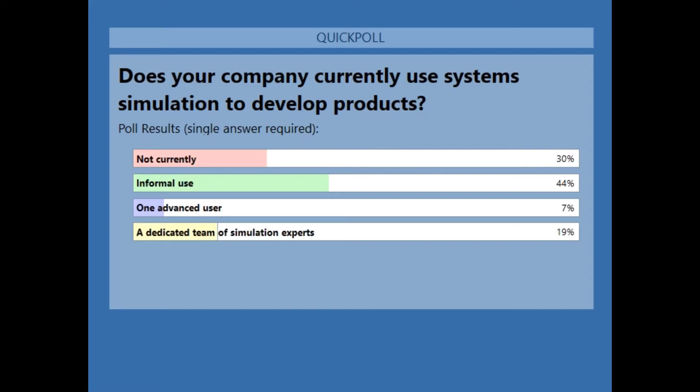So I will spend a little time giving you some background on system simulation, and in particular a tool that we use, which is Amesim. Okay, let's hide those results. Hopefully you can see my screen again, so we'll continue on.

So just a quick overview of the tool you'll see a fair bit of during this session, a software tool called Amesim, which we use for system simulation. Next I'll show you a practical example of the usage. This is just meant as an introduction to the whole idea, key concepts around system simulation, and the type of tools involved.

Amesim is the tool we're talking about, and you'll see a lot of these type of diagrams in this presentation. Basically, what it allows you to do is build up system models of your system. Here we're primarily focused on the mechatronic aspects of it, so you can see some things you might recognize, like a ram for a hydraulic system or a valve. As part of the tool we have a whole group of libraries available from different area spaces, so you can see hydraulics, pneumatics, and we'll show a fair few examples of this as we go through the presentation. What you use this for is to build up a system model of your system.

It can be done as a small number of components or an entire vehicle. And then there's a lot of things you can start doing with that in terms of developing a product. You can do system sizing, and I'll cover some of that in the next few slides. You can look at controls validation, and we'll see how you can also link this into hardware in the loop, software in the loop, etc. So that's what the Amesim tool is, and this is what a lot of the diagrams you'll see in this presentation are based on and built with.

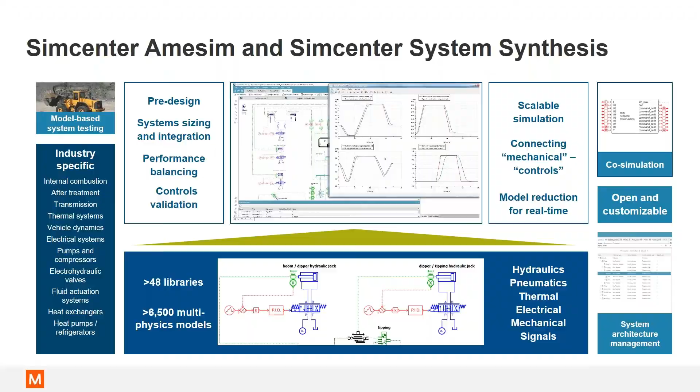So one question you might think is, why would you do this in the first place? Some of the things that come to mind in this particular example would be, clearly we're trying to reduce emissions, so we're taking vehicles like this and electrifying them to reduce emissions, and there's a lot of regulations out there driving that in the industry. Another aspect is to stay ahead of the competition - building more efficient, cleaner vehicles is something everyone wants to do. So this is a tool and methodology that can help you do that very efficiently without building lots of prototypes and doing lots of testing. You can use the system models to gain a lot of information at the beginning of the design process.

With that in mind, I've outlined a couple of challenges you might have if you set out on this kind of path - to take an existing vehicle design and try to figure out how we could make it zero emissions, maybe a battery motor driven electric vehicle. So what you see on the screen is an Amesim system simulation model with the different components that make up our excavator. What we're going to try to do with this is firstly identify the power requirements of our system, so that we could figure out what we need in terms of electric motor and battery power, and then if we plug that system in, will it provide enough energy and power to operate our vehicle in the way that we need it to.

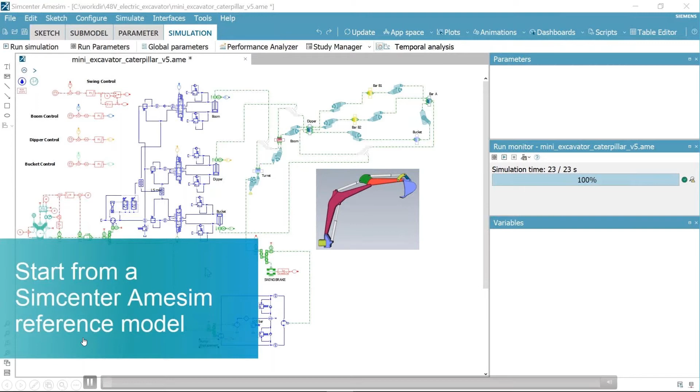And remember, our first objective here is really to figure out what's the energy requirement for our excavator if we were going to replace that engine system with a motor and an equivalent battery. So one of the things you can do with the Amesim tool straight out is model the 3D mechanical characteristics.

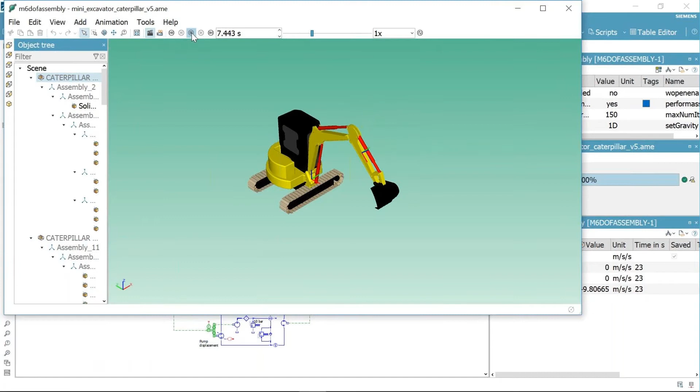Just to help explain what's going on here, this simulation is driven from the simulation model we've just seen, and we just use a simple 3D representation to see what's going on. This is stuff you can do with Amesim. So that is kind of a drive cycle that we're running through this model.

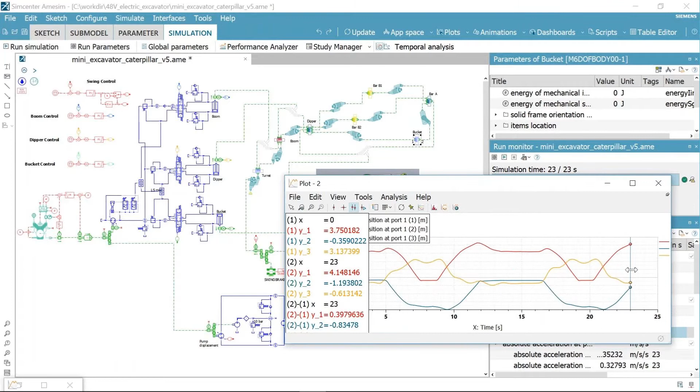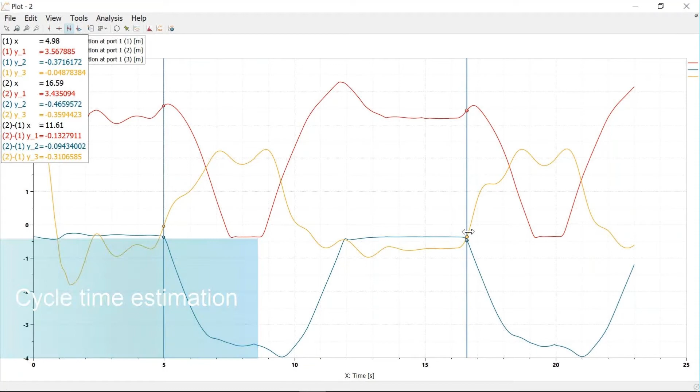As a result of running that drive cycle, we can now interrogate the model, as you can see on the screen here, to see maybe the positions of the different hydraulic rams in the excavator design at a particular time. And something quite useful we could get out of this is an understanding of the cycle time for that particular load cycle we were looking at - how quickly our current excavator runs through that cycle time with its current power ratings, etc.

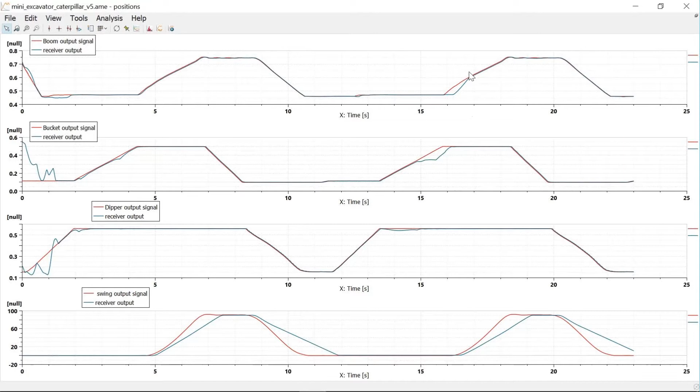Another area we could look at is the responsiveness of the system based on the power available and the reaction of the excavator arm to those input commands, and the resulting load on the hydraulic pump, for example. So we can see how you could model that with a systems model.

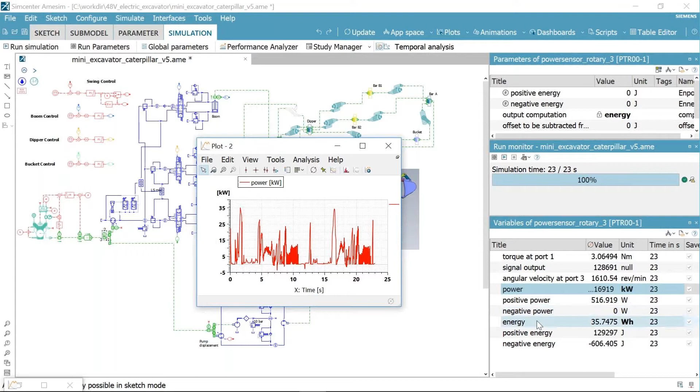Here we get to our challenge, which is understanding, okay, for that duty cycle we've just seen, how much power is required to deliver that, and we can see the accumulation of energy requirement there.

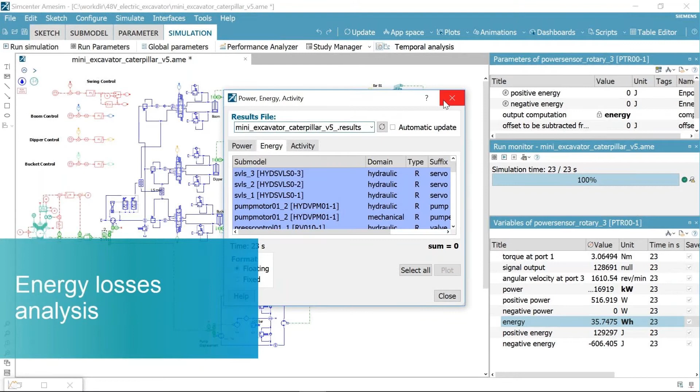And you can imagine how that then can start informing sizing up electric drive and possible battery requirements if we were going to make this an electric solution rather than engine driven. Another thing we can look at is where that energy is being used, and we can look at a breakdown of the energy losses in the different components in our excavator model.

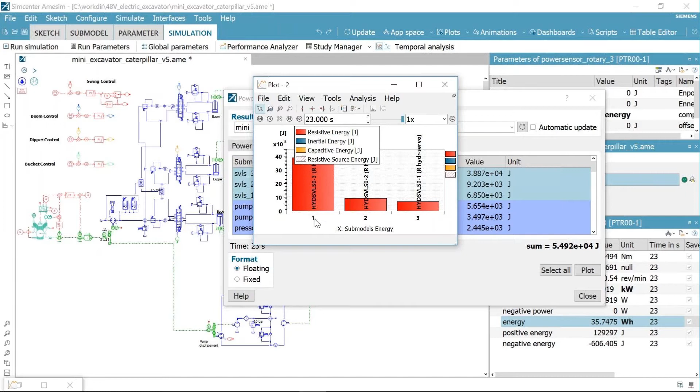So yeah, just illustrating some of the practical uses of a system simulation model. And finally, this final plot shows the total energy consumed by the system, which we can then use to feed into our further design steps along with the cycle time here.

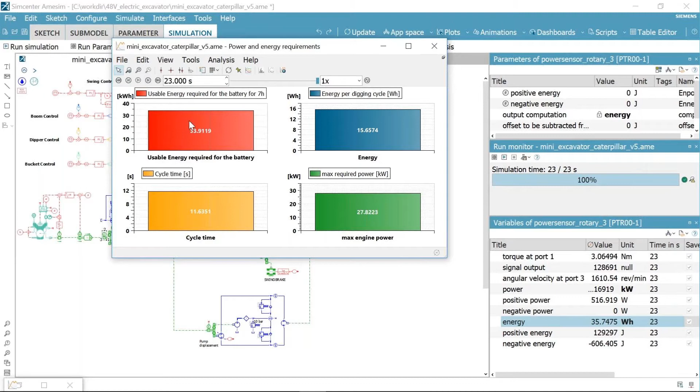So hopefully that gives you a little sense of what these systems models are and the kind of things you can start doing with them. If we move to the next slide here. Just to recap, we saw how we could build out a systems model, look at the energy requirements and cycle time.

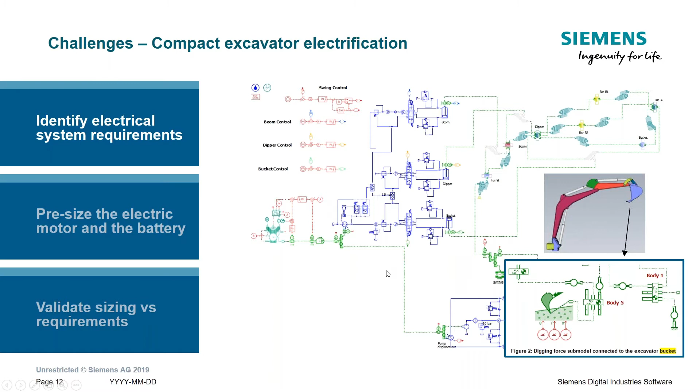And this will come in important further on in the presentation - you can also look at things like the interaction of the bucket with a soil model, and it's possible to do some of that in Amesim. Darius will show how we can take this even further into 3D models and into real-time models as well, but you can start out with everything at this simpler level within the system model.

Just watching my time, I'll keep moving forward here. So electric components need then to be chosen to meet those power and timing requirements that we've just figured out in the previous step. That's something else you can do with system simulation.

So this is the exact same model, but you can see now the user has converted the engine into a motor battery power plant, and we can build up the complexity of this.

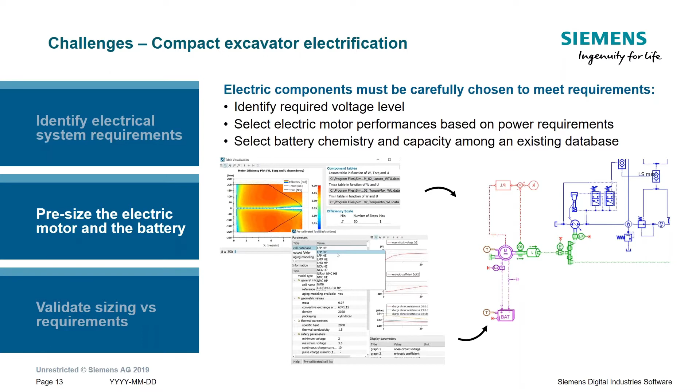This is relatively simple at this stage, but we can start bringing in our motor characteristics and understanding how different characteristics of that motor will affect the performance of the system. We can also start selecting the battery pack, and Amesim and the system simulation tools allow you to do quite a lot of things in that space. Then finally, we might come up with a candidate design, and we want to figure out how efficient that is, what its charge behavior would be, will it meet our requirements, and we can look at advanced things like the aging of the battery pack over multiple duty cycles.

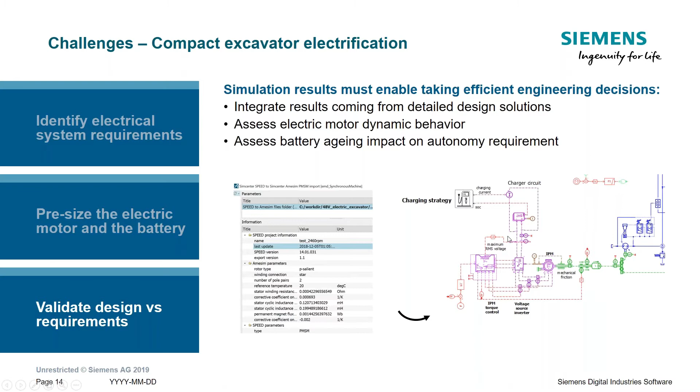So just to summarize some of the practical things you could do with a systems model to get you thinking about the possibilities: we can identify the electrical system requirements. We saw in the video how you could figure out what the size and power requirements are. We can then use that information to size up the electric motor and battery, and then use our systems model to validate those designs and see what the dynamic characteristics are of the system. But that's only part of the picture.

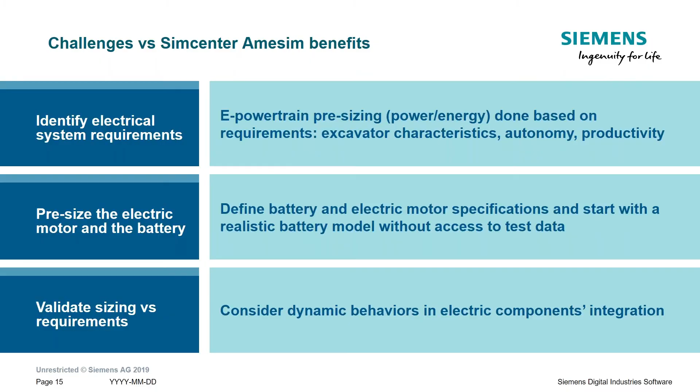We can also use this, effectively a digital twin of our excavator, in man-in-the-loop, software-in-the-loop, hardware-in-the-loop, real-time integration. So we can take that model and convert it into a real-time model and use it to validate controls, either software controls or hardware controls, or we can put a kind of man in the loop, which is something Darius is going to cover in subsequent sessions in a lot more detail, to understand how this system's going to perform and how it's going to feel for the operator.

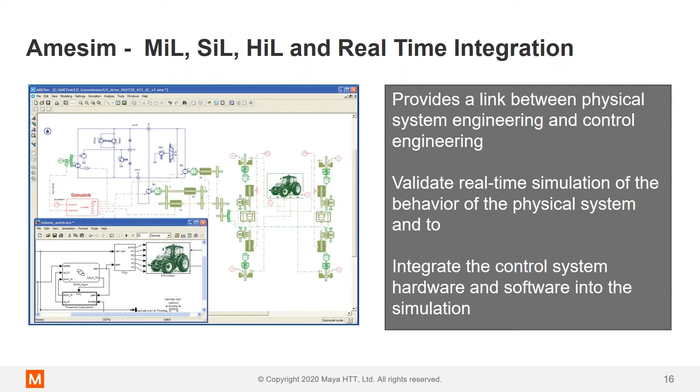So I'm hoping that's given you a little sense of some of the possibilities around system simulation and the Amesim tool. I'm now going to hand over to Darius to get into the detail of hydrogen fuel cells.

Okay Adam, thank you very much for the introduction. I'm trying to take over the controls. Okay, you should be good now. Let's try it. Okay, so we've got the first question here. Darius, do you want me to turn this poll on? Yes, please. All right, I'll let you introduce it.

So the question is whether your company is actively looking at zero emission solutions, or whether you are investigating opportunities for deploying this type of solution into your products. Very simple answers: not yet, or yes, battery electric, or yes, fuel cell electric. So whether you've got a pure battery powered solution or you are more towards fuel cell and hydrogen.

Okay, thanks for those who voted. I'll share the results. So we had around 42% of the folks who responded say not yet. I guess it's something you might be looking at as you're on this session. And then an interesting mix: 33% of the folks who responded battery electric, and 25% fuel cell electric. So hopefully you can see that on your screens. I'll hide that again.

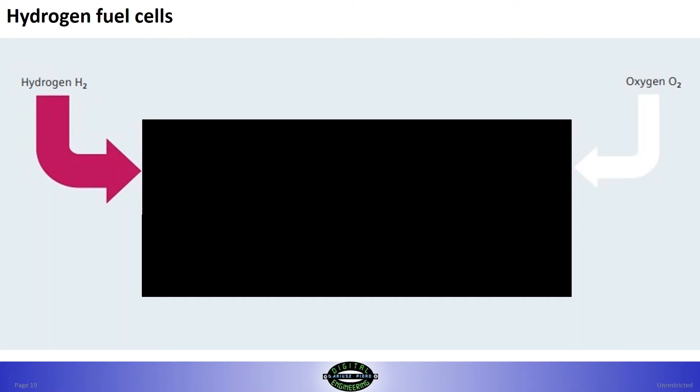So first of all, we have to understand what the fuel cell is. We'll start with a black box approach: as long as we supply hydrogen and oxygen to the black box, the fuel cell, it will provide electricity. When you look into the fuel cell in more detail, you will see there are three main components: the polymer electrolyte membrane, or proton exchange membrane, and two electrodes, anode and cathode, similar to batteries. This is actually an electrochemical device, so there are no moving parts. As long as we provide those reactants, hydrogen and oxygen, we get an electric current generated.

So how does it happen? On the anode side, we've got an electrochemical reaction taking place which allows electrons to be split from a hydrogen molecule. As a result, hydrogen protons migrate from the anode through the electrolyte to the cathode side. As soon as we connect the external load, electrons have a path to flow through the external circuit and migrate from the anode side to the cathode side as well. Then on the cathode side, we've got oxygen coming with air, electrons coming from the external circuit, plus hydrogen protons, and another electrochemical reaction takes place which combines all of them and creates water.

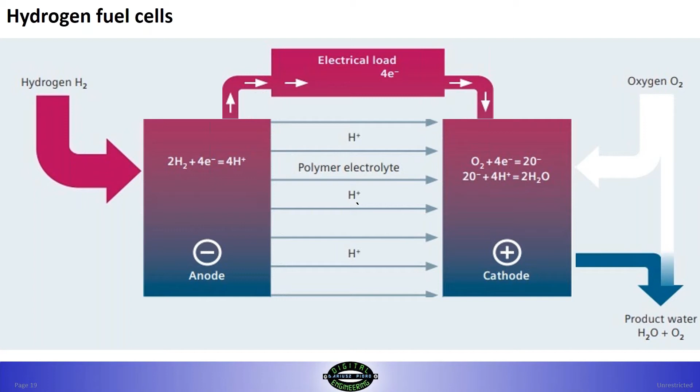During the operations of a fuel cell, some heat is also generated. So I suppose this is the simplest way to explain a basic fuel cell operation. What I'd like to highlight also on this slide is that the external current demanded by load is directly linked to the hydrogen and oxygen quantities. So let's keep in mind that the fuel cell will work perhaps in the optimum way when conditions are steady state, meaning the load is not changing. So let's say you've got a fixed current demanded by external load, and for these conditions it's quite easy to maintain the reactions happening and incoming hydrogen and oxygen. So it's very important to keep in mind that steady state conditions are perhaps most favorable for a fuel cell.

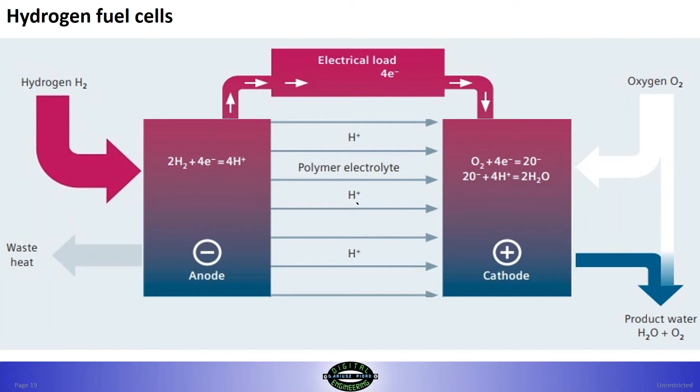One single cell is not really a powerful device. In order to meet power requirements, we will most likely need to connect multiple cells together, and by doing so we end up with a fuel cell stack.

So on this slide, I've got a fuel cell stack here, trying to highlight it with my pointer. As you can see, the fuel cell system is a little bit more complicated than just a single cell, and we can distinguish four main parts of it. Apart from the fuel cell stack, we've got the hydrogen supply subsystem, and also on the oxygen side a supply, where oxygen comes in most cases from air, so we've got this subsystem here. Also, in order for the fuel cell to operate well, you have to maintain temperature, so thermal management is quite important. For that reason, we've got a cooling subsystem, or thermal management subsystem, if you like.

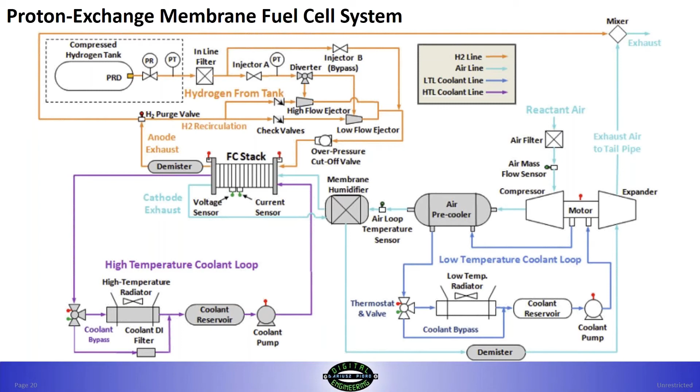I'm not going into details describing every single component here. I just want to highlight that designing and developing fuel cell systems is an engineering challenge, an engineering task on itself. So when you develop this system you've got challenges, and then when you want to deploy it into an application like a bus, car, or any other application, you have to overcome even more challenges. I'll perhaps come back to this on another slide.

Fuel cell idea is not actually a recent idea. It's almost 200 years since Sir William Grove first advertised, or came up with the idea, that a fuel cell will work. I think it was in 1842 when he actually presented a working fuel cell. Since then, fuel cell technology has been in development, we can call it. Over the years, there were different applications like space shuttles, spaceships, or different projects when they wanted to prove that fuel cells can be deployed to off-highway machinery like a tractor, or then on-road vehicles like passenger cars or vans. So over the years, the development was happening, and over the last decade I suppose we've seen the most advanced development.

Also, it seems that there is now a lot of talk about zero emissions, carbon neutral societies, and many countries now are putting forward roadmaps, legislations, proposals for achieving these targets. Fuel cells and hydrogen are taking, I would call it, a main stage in those proposals and roadmaps. So it seems that the time is right.

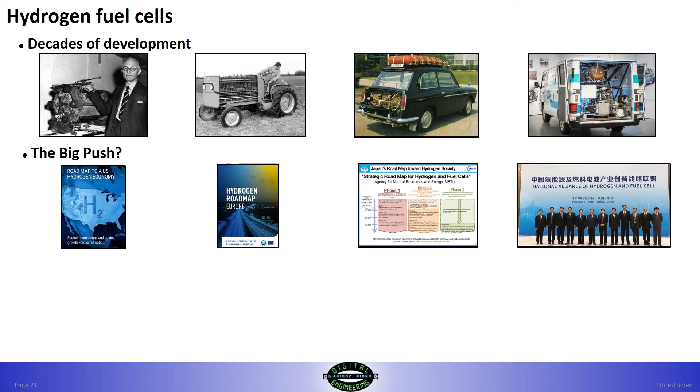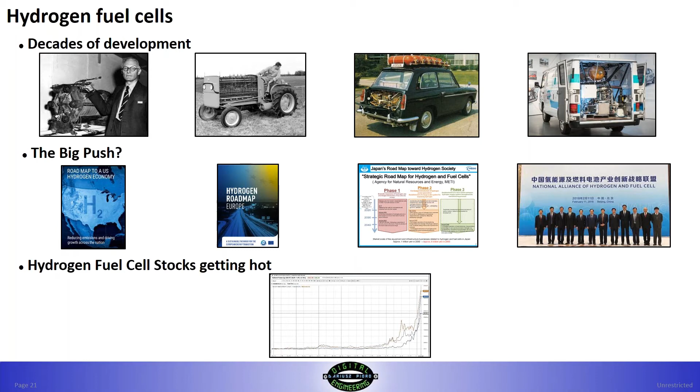And if you go to the off-highway market, fuel cell is actually already present there to some extent. If you think about forklifts working in warehouses, there are already around the world about 40,000 forklifts powered by hydrogen fuel cell powertrains.

Also, other examples off-highway might be excavators. You might be aware that JCB last year has shown a 20-ton excavator powered by hydrogen fuel cell. A few years before that, Volvo showed a smaller, about 3-ton machine powered by a fuel cell provided by their partner Symbio from France. And Hyundai has announced that by 2023, they will offer commercially available heavy equipment powered by hydrogen fuel cells.

So it shows that the projects are getting into bigger scale and more complex machinery. And also in agriculture and open mining machinery, there are some example projects already happening there.

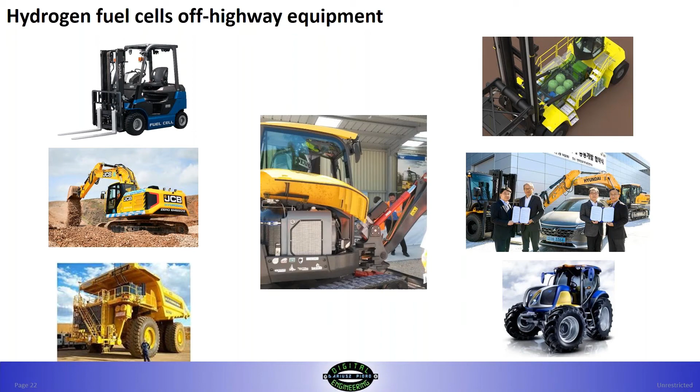There are tools and methodologies that are helping with developing such applications, and this is why we are here. So at this point, I will move towards an example. But before I describe the example, I'll touch on the software I'm using. As Adam presented Amesim extensively, I won't focus too much—I'll just say it's a very powerful, in my mind, multi-domain, multi-physics simulation package.

However, over the years, I was always tasked with providing a real-time digital twin that we can actually operate—meaning you can have a driver, a human being pulling the joysticks, pressing the pedals and controlling the steering wheel, and then deploy simulations to this level. For that reason, we had to link Amesim to different tools, one coming from Simcenter called 3D Motion. I'm not an expert on this one—I learned about it a good few years ago, and it wasn't doing what I needed, so I moved towards another tool, Mevea simulation software.

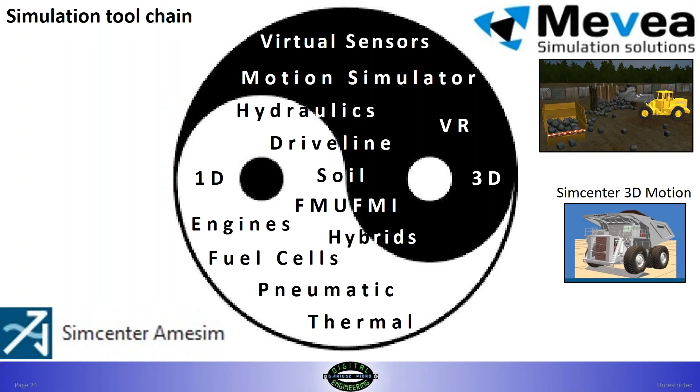And that combination I'm using towards virtual product development. So now I will take you through the steps of how to develop a fuel cell powered wheel loader from scratch, if you like. The whole story starts before you've even got any CAD design done.

We decided that this is a wheeled machine that has got a bucket in front, and we want to move, let's say, a specific payload from specific place A to B at a specific time. And what we do at this phase of the project is use Mevea simulation, which also comes with a simulator. You have to have this human machine interface.

It can be a very advanced simulator, 6 degrees of freedom, virtual reality, or curved screens, or it can be a very simple setup like on a desk, where you've got pedals, joysticks, and a steering wheel. So it's up to you what you want to have.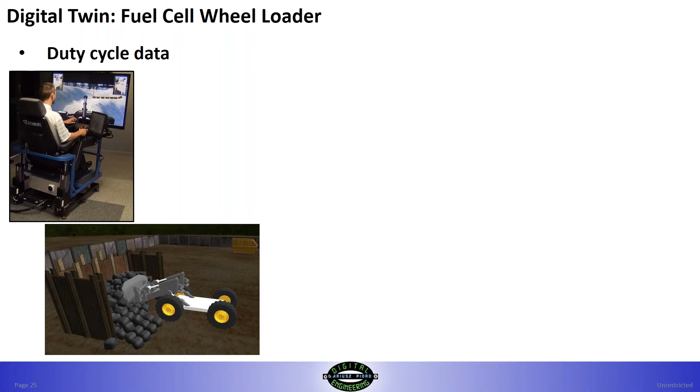But anyway, we give this to the operator and task him to drive this machine. It's a virtual machine. He is operating a duty cycle that we task him with. For example, it can be a short loading cycle when you ask him to go into the pile, grab as much as he can of the stones, and dump them into the skip, and repeat it. At this stage, we do not simulate any hydraulics, any drivelines, any power plant, either engine or fuel cell. We just basically have wheels and actuators.

And we make control of the wheels dependent on the pedal positions, and actuators we control from the joystick position. So we scale the joystick into the actuator velocity, and the operator has a way of controlling it. If he pushes the joystick farther, the actuator moves faster, and so on.

And then by performing a duty cycle, he has to focus on controlling the machine in the right way. He cannot go very quickly into the pile because it will make the machine unstable. He just consciously operates the machine.

As the results of this phase, we're getting data. So you've got a virtual representation of the first cut of the machine, if you like. And what you're getting is actual data for the torque, speed of the wheels, and velocity, position, and force of the actuators.

Thinking about the project in advance, normally to get this type of data, you have to instrument a machine and put it into the proving ground, test it, and get the data there, or you have to use some scaling down from an existing product if you've got some data. So what we're seeing here is a massive advantage of getting actual data very early, at an earlier phase of the project.

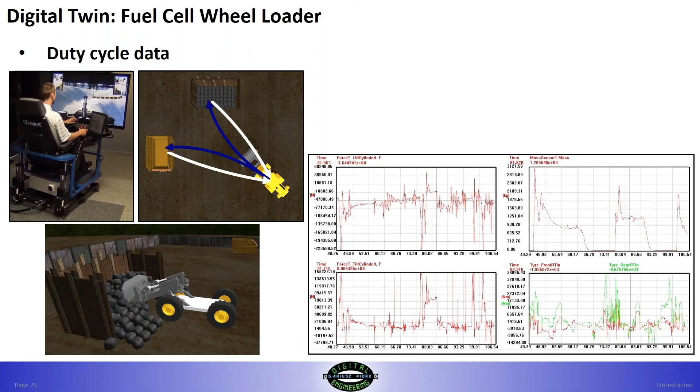And what do we do with this data? We move on to Amesim, and now we use the torque speed information from the simulator to design the driveline, and we design it from the wheel.

If you know that you've got, let's say, 4 wheels, and you want to have a type of 4-wheel drive or transmission, whether it's mechanical transmission or hydrostatic transmission, you build as many Amesim configurations as you like, as you need, and you benchmark them against each other in Amesim. So you've got, as Adam showed, your ways of comparing different configurations, changing parameters, and different layouts as well.

So if we have to pick up the electric motor characteristics or battery characteristics, we do it right. We select it for the duty cycle that it has to meet in real life.

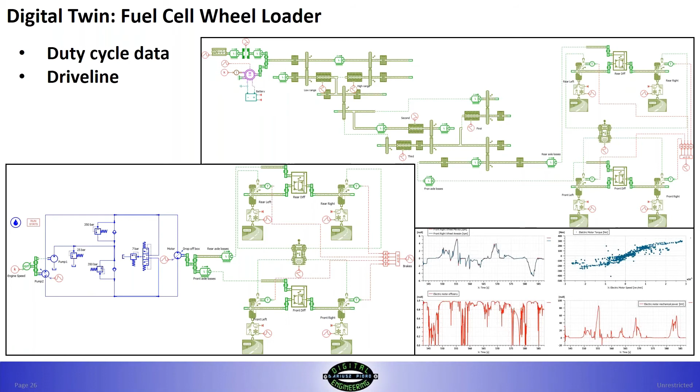And similarly, we do with hydraulics. So when you've got now actuator force, displacement, position, velocity, and force, you can pick up a hydraulic ram size, i.e. piston diameter and rod diameter, and from that you will get the pressure and flow required by this single cylinder.

If you do it for all the services, all the actuators within your machine, you will get the hydraulic flow demanded by the combined services. And then you can decide whether you meet this flow from a single pump or multi-pump solutions.

You've got 4 valves making up the service control of a single service, and those valves are controlled from the ECU, the electronic control unit, which sends signals for the control operations.

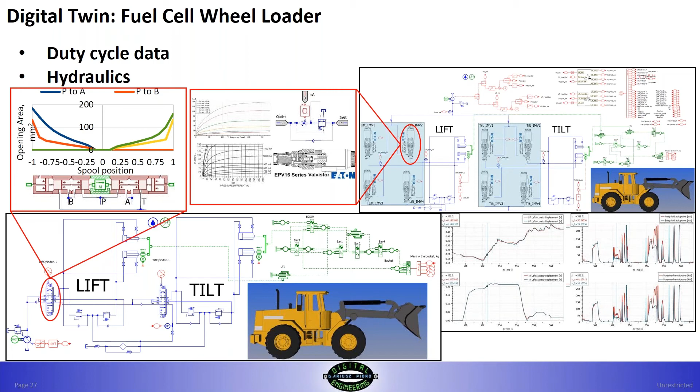Now we're moving to fuel cells. When you've got a driveline and hydraulics, in the case of a wheel loader, those are perhaps the 2 main systems demanding power. From those 2 separate simulations, you can generate information about power demand, and then move on to the fuel cell.

Amesim is a very flexible simulation platform, because when it comes to fuel cells, it allows you to develop a single cell, almost from the geometry of the membrane and the cathodes and the size of the fuel cell, and it will provide you the polarization curve.

That curve shown here on the graph has on the x-axis the current density of the cell, which is the current generated by the cell divided by the area, and then the voltage provided by the cell.

This is very crucial information, because based on it we build a fuel cell stack and decide on the voltage the fuel cell system has to provide, the current, which will dictate how many fuel cells and what size the fuel cell is, and so on.

At the same time, we have to design around this fuel cell stack the hydrogen supply, oxygen supply, and thermal system, as you remember from a few slides before. Amesim allows you to do it all in one tool, you don't have to go to multiple tools to develop it.

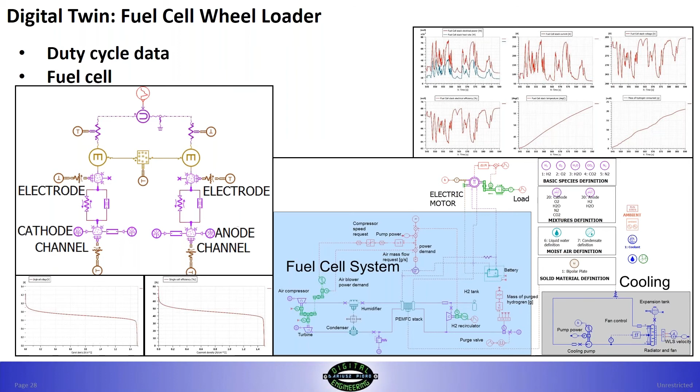Something Adam already mentioned is control development, so how Amesim can help with these activities. First of all, I have to mention that there is some feature in Amesim for this.

There are blocks called state charts, so you can develop your basic logic in Amesim, you don't have to go to a third-party tool. If you need to develop really complex and advanced logic, you can go to another tool to do it in different ways.

One way is exporting the Amesim model as FMU, or if you're using MATLAB Simulink, there's a dedicated interface for that. Actually, there are three ways. You can export the Amesim model to Simulink as a function and work within Simulink only. You can export the Simulink model to Amesim, import it with some parameters, and then change things more in Amesim than in the controller. The third way is co-simulation, perhaps the most flexible, because two solvers run in their own tools and you have access to both at the same time, so you can change parameters and layout on both sides.

This approach allows control engineers to be involved in system design early in the project. By providing them with a plant model, let's say a whole vehicle, a whole wheel loader, they can start developing the control strategy for the fuel cell, for the BMS battery management system, or for the electrohydraulics for the valves. Anything that has to be controlled, they now have a plant model accurately representing the machine they'll eventually have, and they can start their process very early.

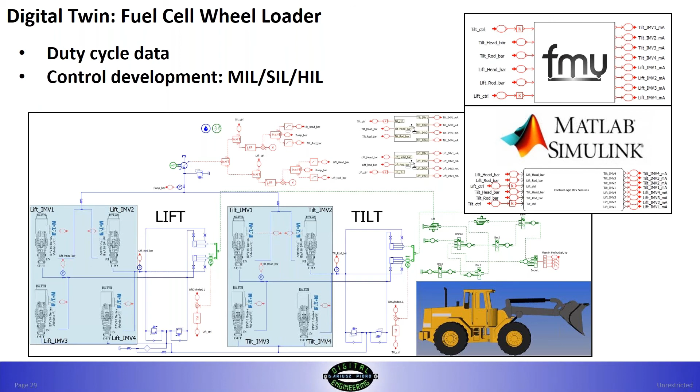And now, what Adam also mentioned, is driver in the loop. Naturally, as you progress through those steps, you end up with something which is a digital twin of your product, which you will prototype at some phase. But now you can go back to the simulator again. From all those simulations, you select the configurations you want to use, and you give this virtual representation of the machine back to the operator.

Whereas previously he had no hydraulics, no driveline, no fuel cell information there — it was just him controlling wheels and actuators — now the whole design is in his hands. He can advise whether flow share is right, what happens when he puts the gear in reverse and applies full hydraulics, whether the power demand is met by the system, or if it's too slow on the hydraulics or too slow on the driveline, and so on.

So he can now provide you very good and valid feedback. If you think about it, you haven't manufactured anything yet — you've just done extensive simulations of all crucial aspects, everything that matters to the machine design, and the operator can test it for you. So you don't have to wait for the machine to be available. He jumps on the simulator, drives it the way he normally would drive a machine, and you're getting his feedback.

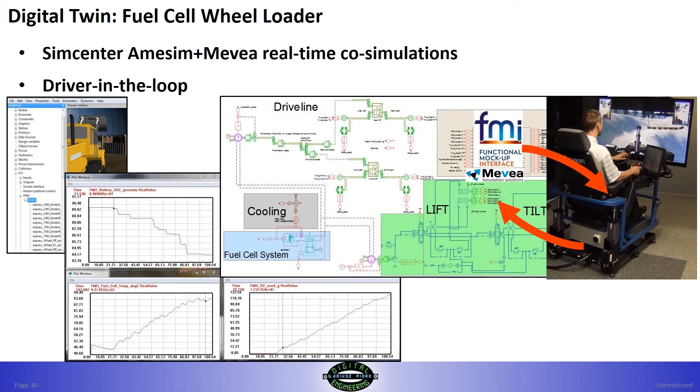This is very powerful, and it brings all the answers to you early in the design phase. Something less common — I'm not sure anyone is using this approach — is a follow-up from the previous step. When you've got the operator in the loop with the virtual representation of the machine, why not swap the virtual representation of the fuel cell system with a real one? So imagine you've got the fuel cell, electric motor, and hydrogen storage, or whatever is required for the fuel cell system, connected on a test rig.

That test rig is then hooked up to a virtual representation of the machine in the form of a simulator. So the operator can demand the motor speed. Let's say the application uses one motor speed, with one electric motor powering both the driveline and, through the transmission, the shaft going to the hydraulic pump.

You can imagine that he demands the electric motor speed, then demand is sent to the test rig, motor speed is set up, and the current is taken from the actual fuel cell or battery, and actual hydrogen is used. In return, this test rig sends the actual motor speed to the simulator. And as soon as the operator starts performing a duty cycle, engages forward, or applies load to hydraulics, we see that the load generated in the virtual environment is transferred to the test rig as a load on the electric motor, demanding the electric brake to apply torque to the electric motor.

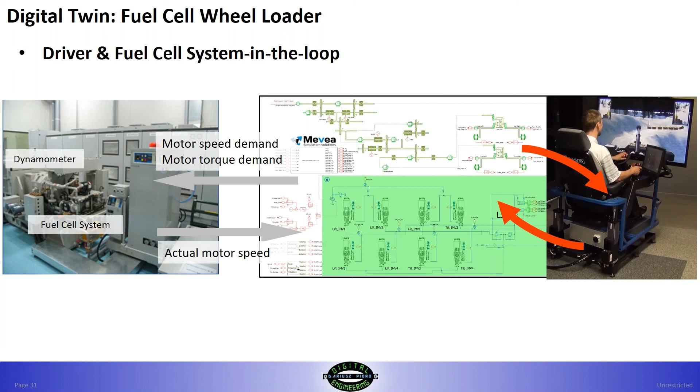So anyway, this is taking your development phase to the next level. If you have to swap something on the fuel cell system, you can do it here, and you can accurately map the configuration and calibration of the fuel cell system to the application, in this case, the wheel loader shovel.

And I think from this, you could simply see that this approach is building, is actually creating a silo breaker. This allows multi-domain subject matter experts to collaborate, to be exposed to the same things at the same time, rather than a sequential approach where hydraulics works separately from other teams. So it's taking all the knowledge you've got in your company and making use of it.

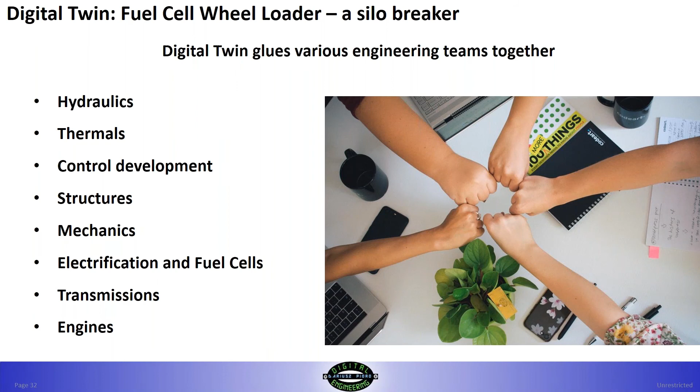Also, something I haven't mentioned is structures - once you've got that CAD geometry done and you've got forces coming from the simulator, you can put this to stress engineers to run FEA analysis on the design of the loader arm. And if you find it's not optimal and you want to change it, you can do so in the simulation far quicker than on the actual machine. So a true silo breaker.

Let's sum up. So now you've seen those steps, and you can clearly see that you've got a solution that is optimized, and you can engage the operator, get an assessment of the machine without any prototype available - that's a great advantage. You've got all the engineering teams working on their bits, bringing them together and validating the same machine. However, by doing this, you end up with a digital twin where the engineering life might come to an end - you don't need to do much more engineering once you're happy with the design.

But on the other hand, you can use this digital twin for other aspects. It's, let's say, free of charge because it's now sitting in your lab - it's there. You can start doing some predictive maintenance. You can do other clever stuff with this simulator.

But also you can promote your product. So if you're working on a new machine that isn't manufactured yet, you can deploy this simulator, give it to your customers, invite people to assess the machine, and maybe some of them will come up with ideas like 'why don't you do this and that' before you manufacture a prototype. So the benefits of doing this process aren't just purely engineering - they reach far beyond for other activities as well.

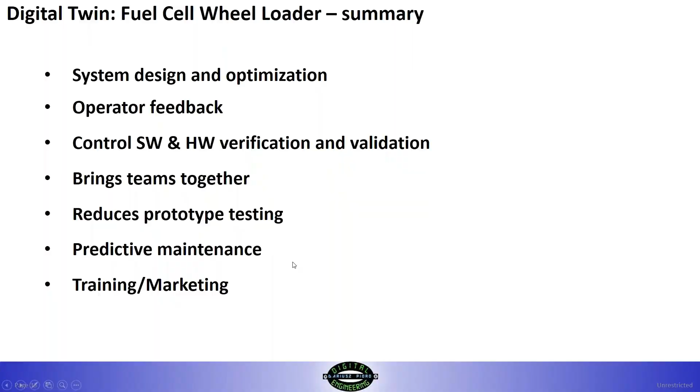So I think with this, it's going back to Adam.